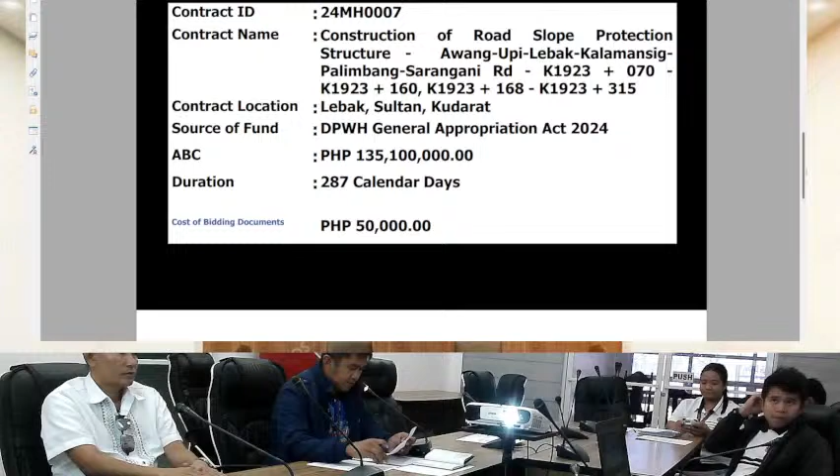So for our basic contracting, we have three civil works projects to discuss. First, we have 24MH0007, construction of road slope protection structure along Lebak, Sarangani Road, kilometer 1923 plus 070 to kilometer 1923 plus 160, and kilometer 1923 plus 168 to kilometer 1923 plus 315. Contract location, Lebak, Sultan Kudarat. The source of fund is DPWH General Appropriation of 2024 with an ABC of 135,100,000 pesos and a duration of 287 calendar days.

This is a rebid project due to the first bidding being declared a failure, dahil na-found out na merong mali sa programming ng kanyang program of works. So next is the 24MH0008.

24MH0008, construction of road slope protection structure along Lebak, Sarangani Road, kilometer 1923 plus 879 to kilometer 1924 plus 014, kilometer 1924 plus 513 to kilometer 1924 plus 660. Contract location, Lebak, Sultan Kudarat. Source of fund, DPWH GAA 2024 with an ABC of 141,855,000 pesos and a duration of 293 calendar days.

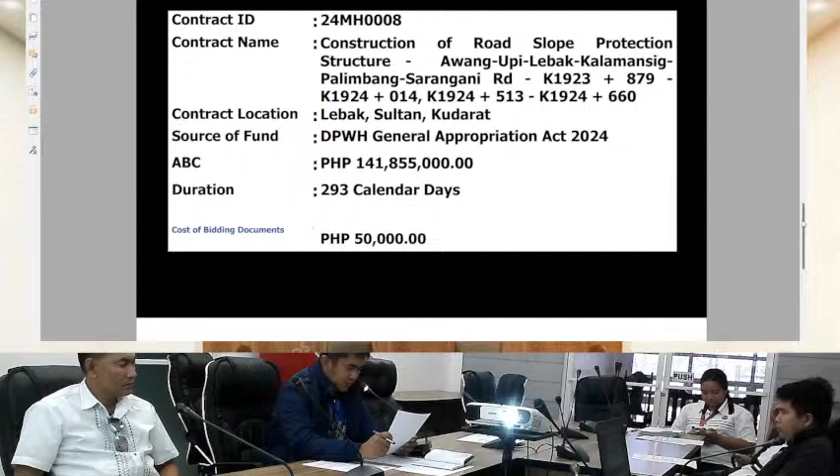Same with the previous contract 24MH0007, this project is also a rebid project due to the first bidding or first activity of this same contract ID being declared failed, dahil meron nagkamali sa programming o sa POW.

Next, contract ID 24MH0079, construction of employees quarters at DPWH Sultan Kudarat 2nd District Engineering Office, Lebak, Sultan Kudarat. Contract location, Lebak, Sultan Kudarat, with an ABC of 12,372,500 pesos and a duration of 240 calendar days.

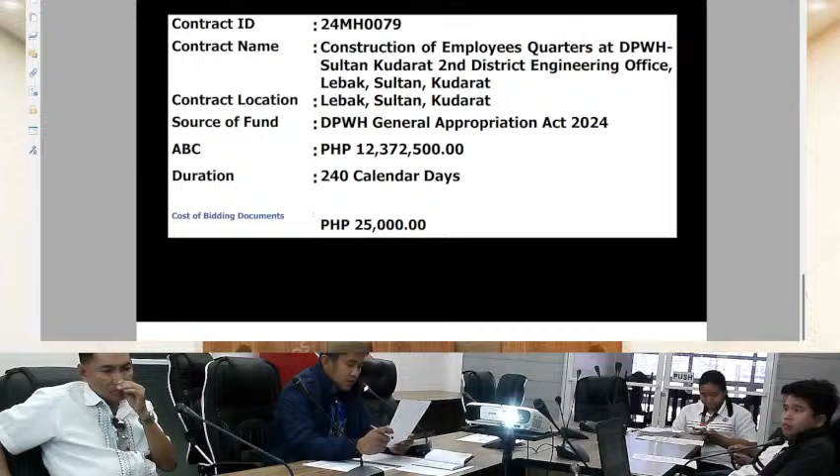So next, we'll have the discussion from the end user, the planning design section, represented by the engineers. First, we'll have the discussion on the first two projects, 24MH0007 and 24MH0008.

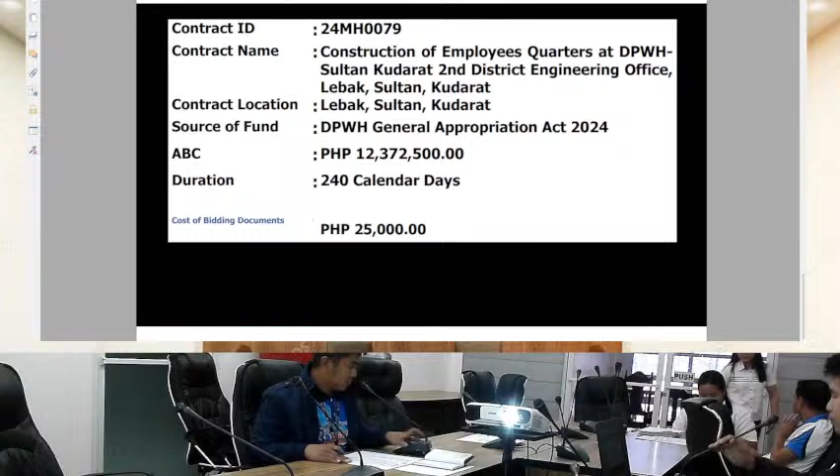Good morning, everyone. I'm presenting this project with the contract name Construction of Road Slope Protection Structure, Awang Upi Lebak, Palimbang, Sarangani Road from kilometer 1923-070 to kilometer 1923 plus 160, and the other section is kilometer 1923 plus 168 to kilometer 1923 plus 315. Contract location is Lebak, Sultan Kudarat with the ABC amount of 135,100,000 pesos.

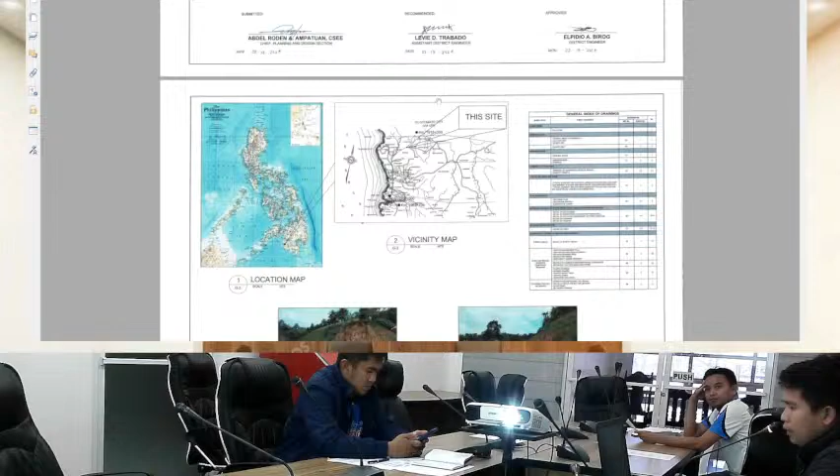Let's proceed to the DED. First is the detailed engineering design plan. Next is the location map and the vicinity map, the geotag photos. Next page is the quarry map, the general notes, the abbreviations and symbols.

For the summary of quantities: for earthwork, sub-base and base courses, aggregate sub-base course, 45 cubic meter. For surface courses, Portland cement concrete pavement, 225 square meter. For the bridge construction, item 404, reinforcing steel grade 40, 1,785 kilograms. Structural concrete, 20.68 MPa class A, 28 days, 43 cubic meter.

For the drainage and slope protection structures, we have catch basin, 910 mm diameter, two pieces. Concrete slope protection, 531.25 cubic meter. For the erosion control mat type 1, 3,971.20 square meter. For the permanent ground anchor, we have 9,932 linear meter. Hydro seeding, 3,971.20 square meter. For the active wire mesh, 3,971 square meter.

For the miscellaneous structures, we have coco net, 3,971.20 square meter. For the tapered solar street light, we have 9. For the quantity sheets, we have the station, the area fill, the span, the volume of fill, and the structural excavation.

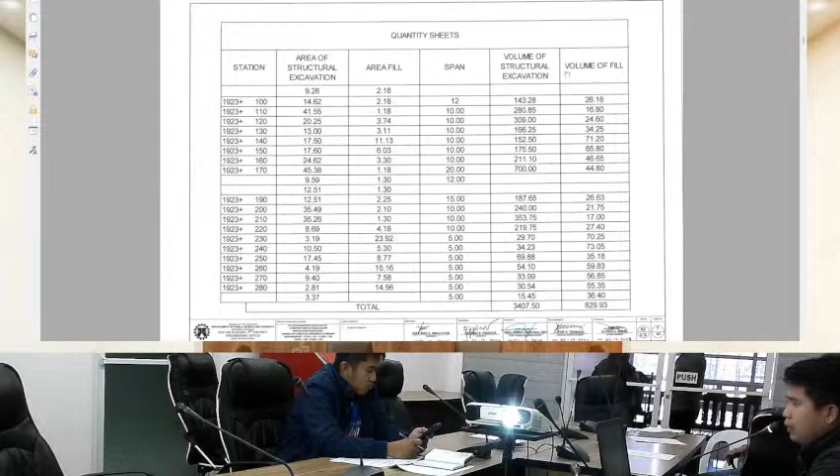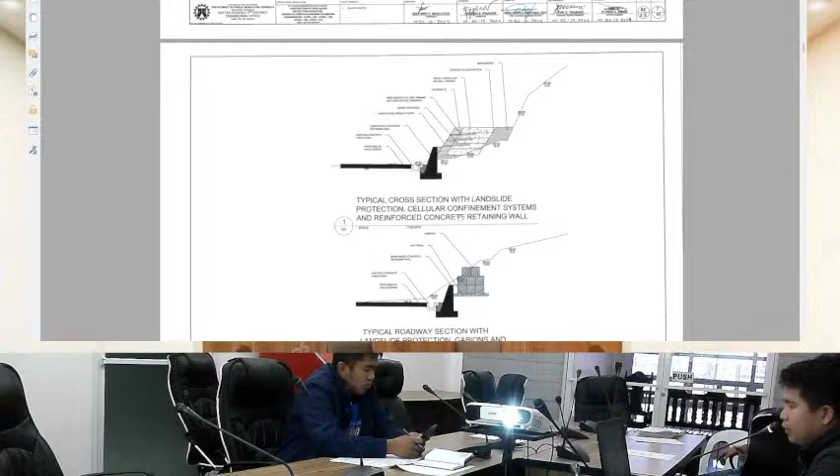Here is the typical cross-section with landslide protection, cellular confinement system, and the reinforced concrete retaining wall. So here in the design, you can see we have 19 layers of geogrid, and we have also vegetation and grass cover, and the reinforced concrete retaining wall, and meron tayong details sa baba nito.

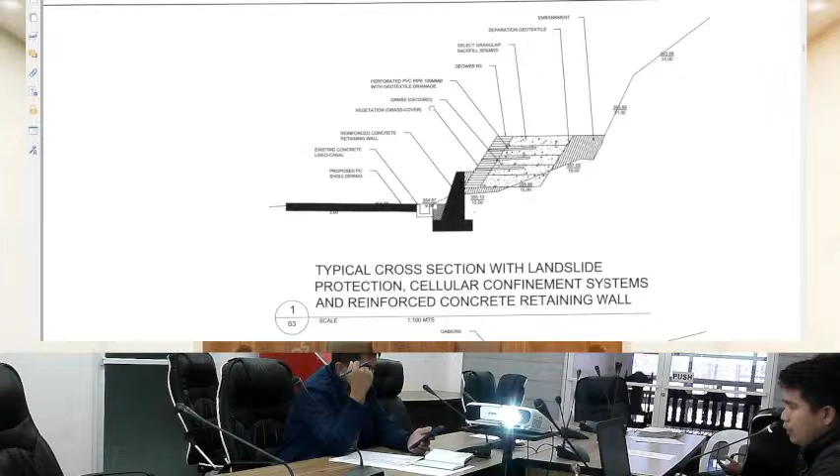We have also proposed shouldering, and we have also separation geotextile, and the perforated pipe 100 mm diameter. We have 3 layers of that perforated pipe. And for the other portion, we have also gabions and mattress.

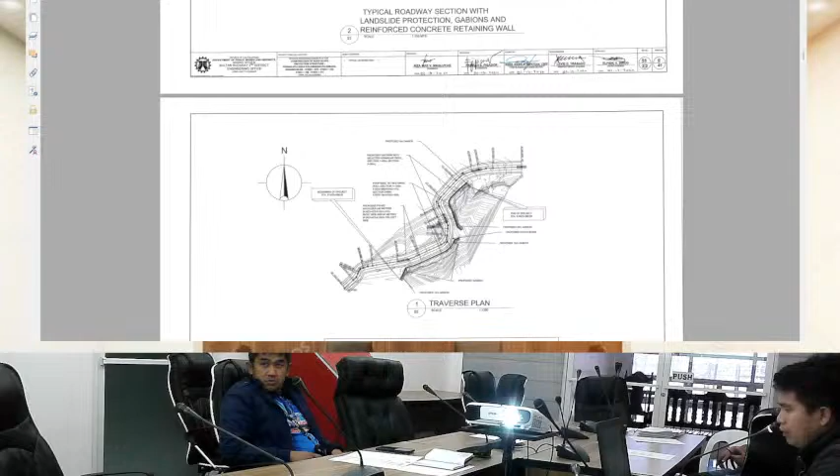Here is the traverse plan and the center line profile. The details of our catch basins. The schedule of the catch basin is in station 1923-170 on the right side.

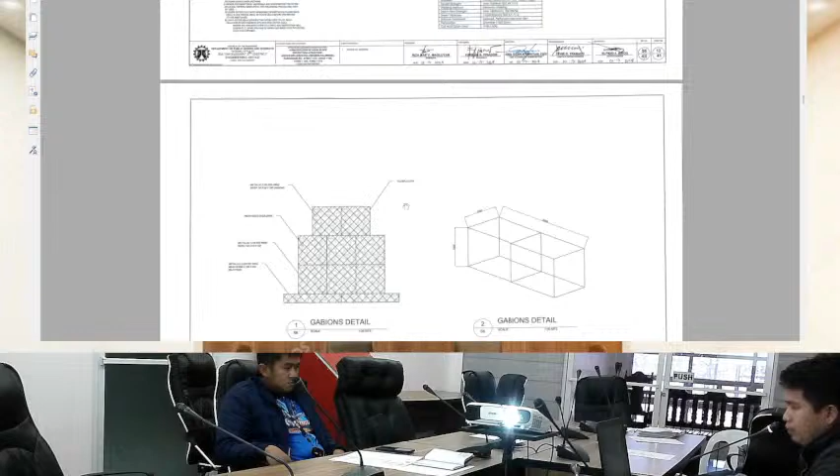We have also the reinforced concrete landslide protection retaining wall, 3 meters in height. The details of the geogrid detail, the geoweb with geogrid details, the cellular confinement system drawing, the details of gabions and mattress. Next are the cross sections.

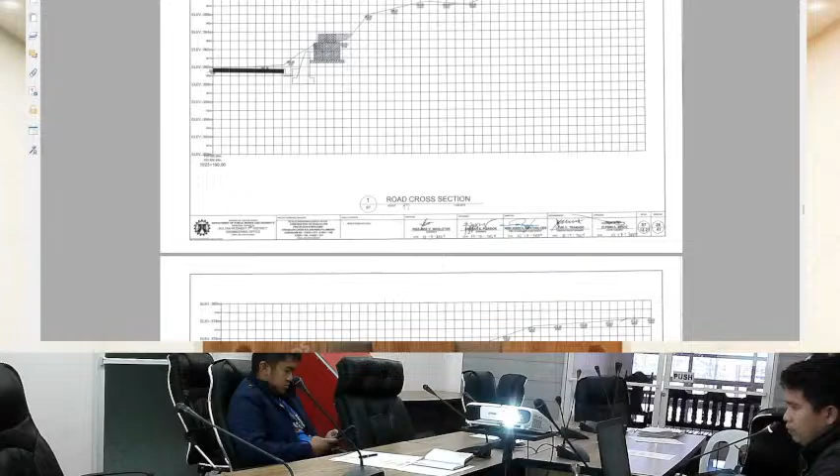Here are the details of the solar street light post with pedestal, the traffic management plan, the detail of construction mesh fence, the road plastic barriers, and our standard project billboard.

Next project that I will be presenting is 24 MH.

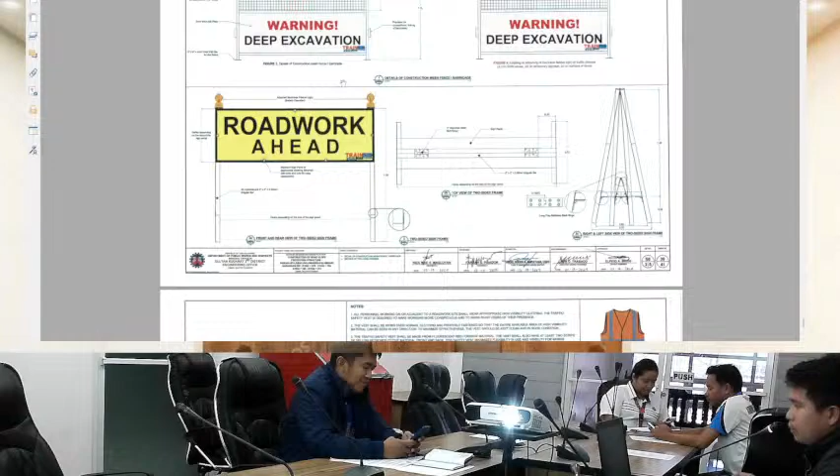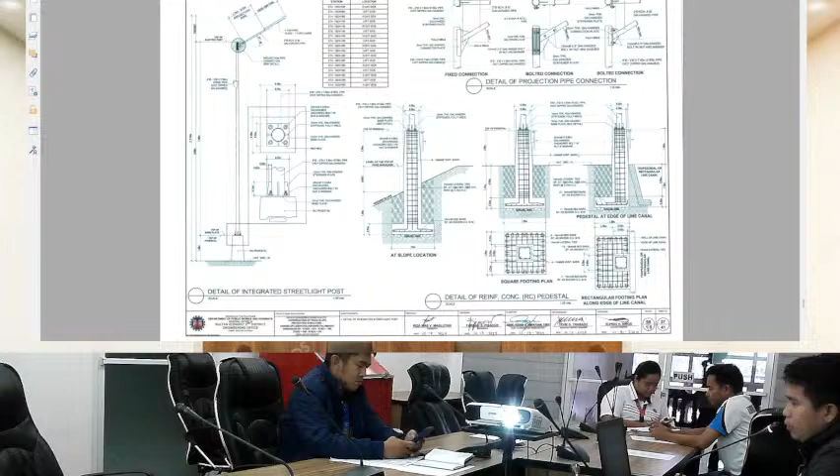We have a rectification here on our solar street light post. Fabricated ones are not allowed. The standard tapered one that is purchased should be used, not the fabricated kind. The length should follow the standard; welding is not allowed because the connection becomes weak. So to the contractors, please follow the ordered length strictly, to prevent rectification during inspection. Thank you. Next project is the

24H008, contract name is the construction of road slope protection structure, Awang Upi, Lebak, Kalamansig, Palimbang, Sarangani Road, from kilometer 1923 plus 879 to kilometer 1924 plus 014.

Second station, kilometer 1924 plus 513 to kilometer 1924 plus 660. Contract location is Lebak, Sultan Kudarat, with an ABC amount of 141,855,000. For the detailed engineering design plan, we have 1,974 square meters.

Here is the location map and the vicinity map. For the quarry map, the general notes, next is the abbreviation and symbols.

Here is the summary of quantities. For the sub-base and base courses item, 176.33 cubic meter. For the surface courses, Portland cement concrete pavement, 174 square meter.

For the drainage and slope protection structures, concrete slope protection, we have 1,551 cubic meter. For the gabions, 1 by 1 by 2 metallic coated, 560 cubic meter. For the mattress, we have 201.6 cubic meter.

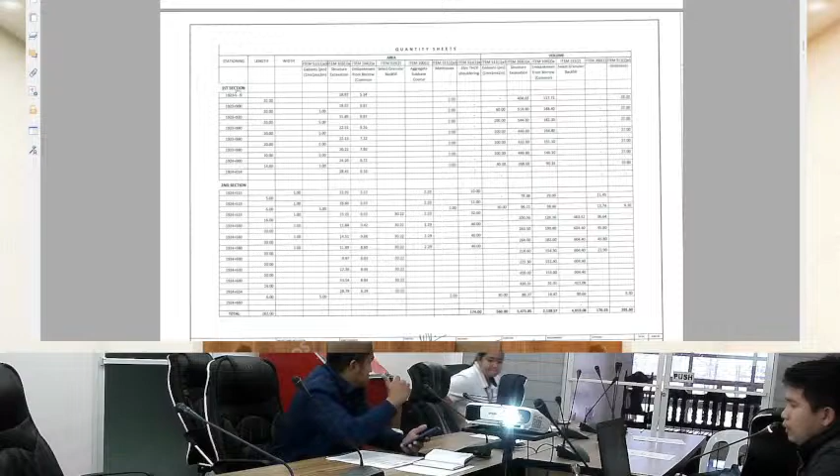Next is the quantity sheets. You can see the first section and the second section and its total quantities. Next is the typical roadway section with normal crown, reinforced concrete retaining wall with cellular confinement system, geoweb, and solar

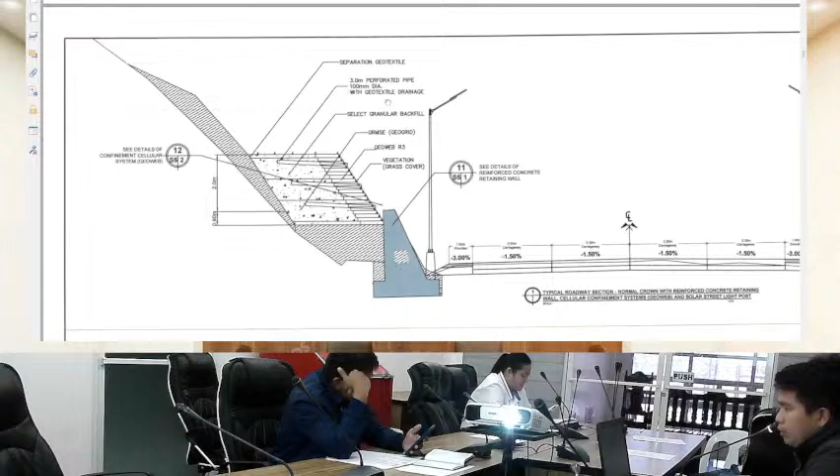So here we have geotextile separation, here it is. The perforated 3 meters perforated pipe, 100 mm diameter, with geotextile drainage, here it is. For the GRMSE geogrid, for the GeoWeb R3, and for the vegetation, don't forget the vegetation grass cover because it is needed.

Next, we also have details of the reinforced concrete retaining wall. So here, for the second station, we have gabions, head size boulders for gabions, metallic coated wire mesh for gabions and for mattresses.

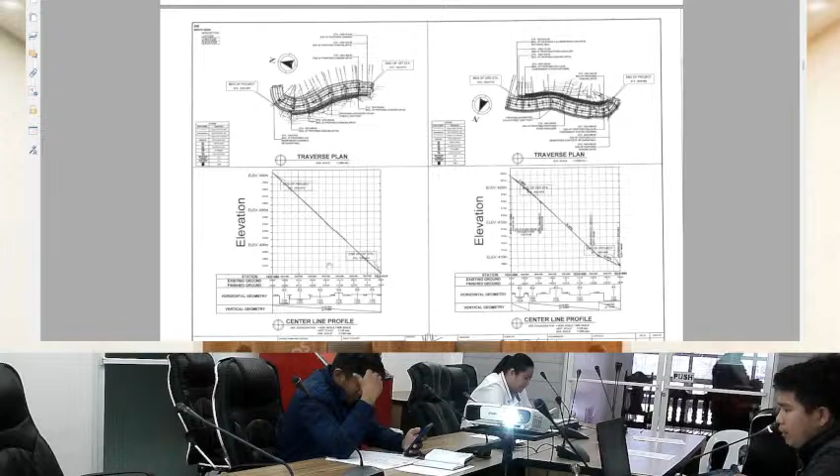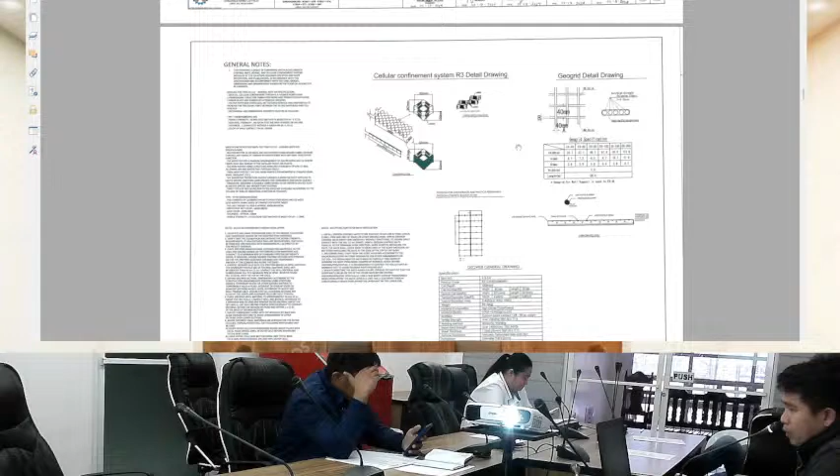Here is the traverse plan for the first section and the traverse and centerline profile for the second section. For the details of the 2 meters reinforced concrete landslide retaining wall, the details of the geogrid and the perforated pipe details, the general confinement of cellular system drawing and also details of the geogrids, the details of gabions and mattresses, and next are the cross sections.

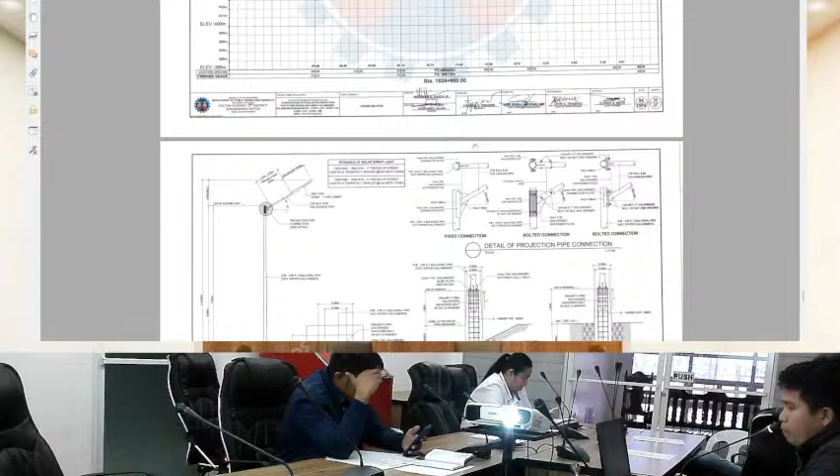We also have the details of the integrated solar street light post. As I mentioned earlier, it should be full length, not one with welding.

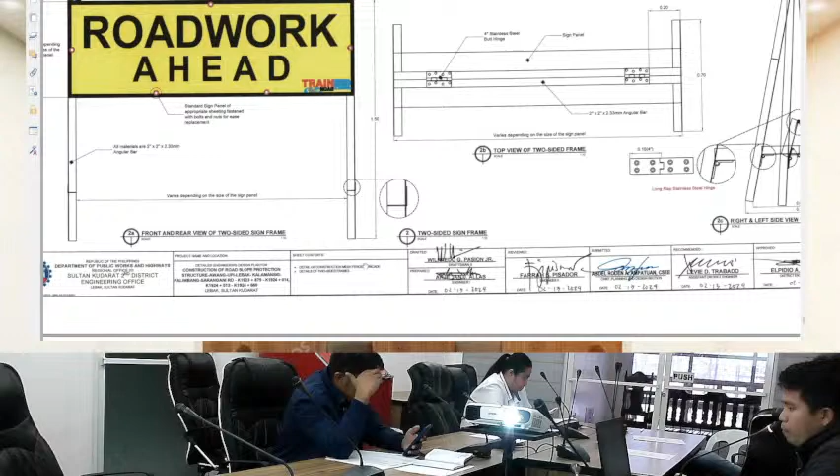Here is the typical traffic management plan, the construction mesh fence barricade, the road plastic barriers, and the project's signage.

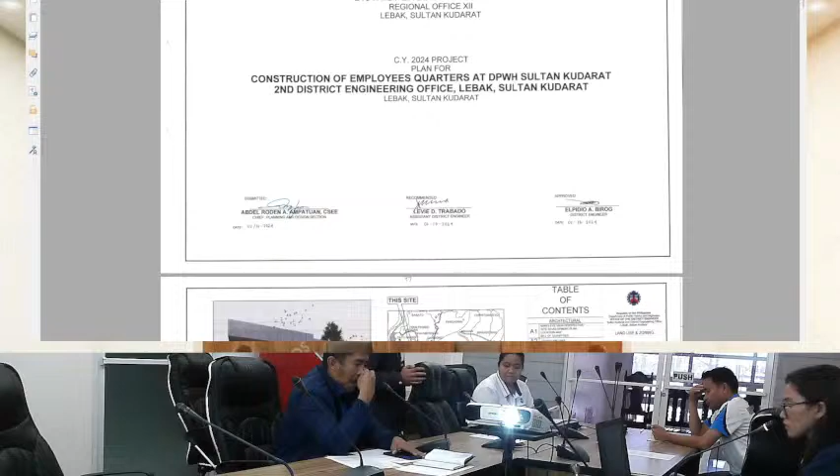Today I will be discussing the one MPB project with contract ID 24MH079, construction of employees quarters at DPWH Sultan Kudarat 2nd District Engineering Office, Lebak, Sultan Kudarat, with an ABC of 12,372,500 and a duration of 240 calendar days. This building is a new construction which is a two-story building.

This is the perspective of the building here. We also have the location map and the site development plan of the project within the vicinity of the DPWH.

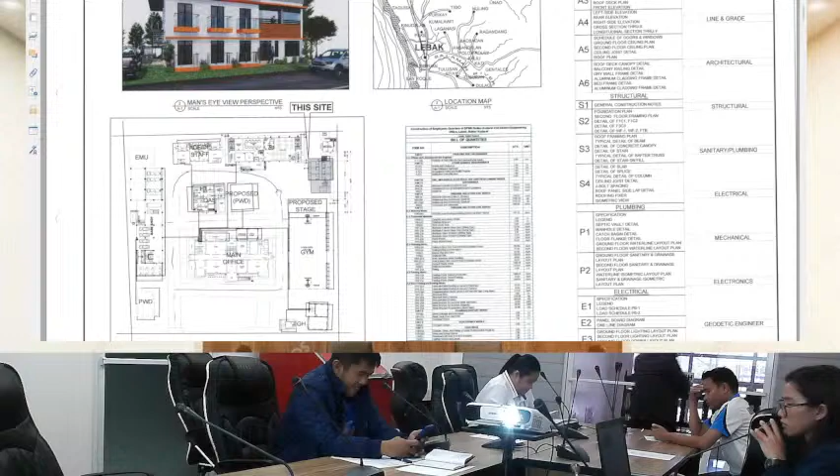For the bill of quantities, we have provision of field office for the engineers, rental basis, 6 months. For permits and clearances, 1 lump sum.

Project billboard/signboard, one each. Occupational safety and health program, 1 lump sum. Mobilization and demobilization, 1 lump sum.

For civil, mechanical, electrical, and sanitary plumbing works, for earthworks, we have structural excavation, common soil, 173.01 cubic meter.

For embankment from roadway/structure excavation, 119.16 cubic meter. For gravel fill, we have 27.67 cubic meter. For finishing and other civil works, we have...

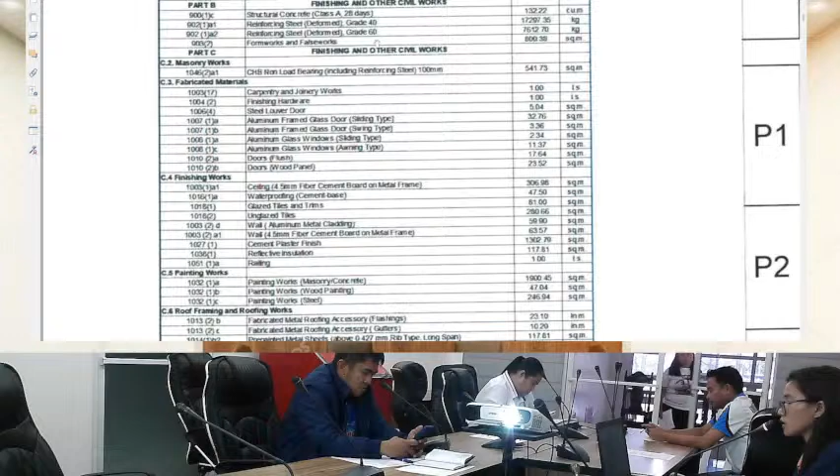For structural concrete class A, 132.22 cubic meter. For reinforcing steel deformed bars, grade 40, 17,297.35 kilogram.

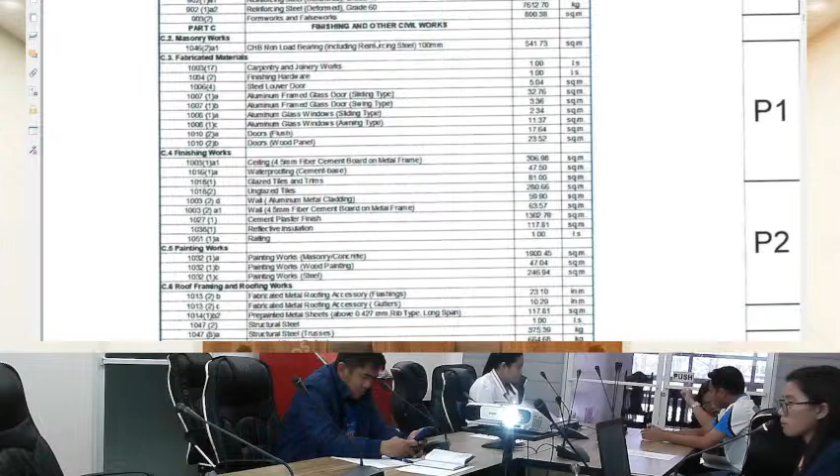And for grade 60, we have 7,612.70 kilogram. And for formworks and falseworks, we have 800.38 square meter.

For masonry works, we have here CHB non-load bearing, including reinforcing steel, 100 mm thick, 541.73 square meter.

For fabricated materials, for carpentry and joinery works, 1 lump sum, finishing hardware, 1 lump sum, steel louver door, 5.04 square meter, aluminum frame glass door, sliding type, 32.76 square meter.

For swing type, we have 3.36 square meter.

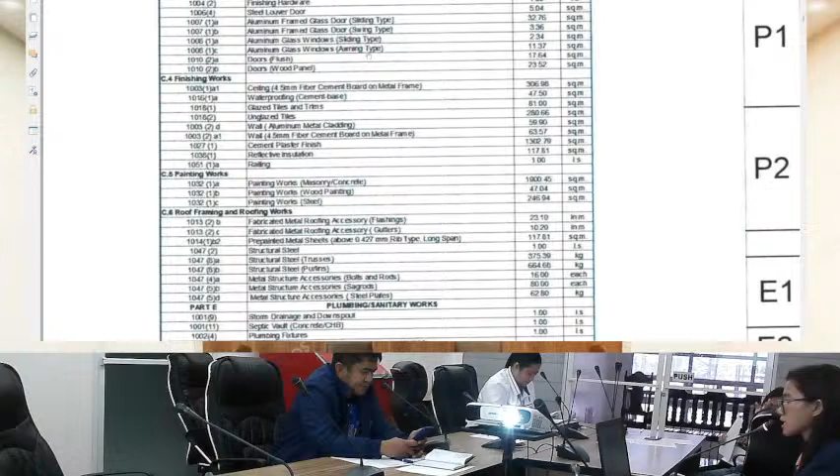And for aluminum glass windows, sliding type, 2.34 square meter. And for awning type, we have 11.37 square meter.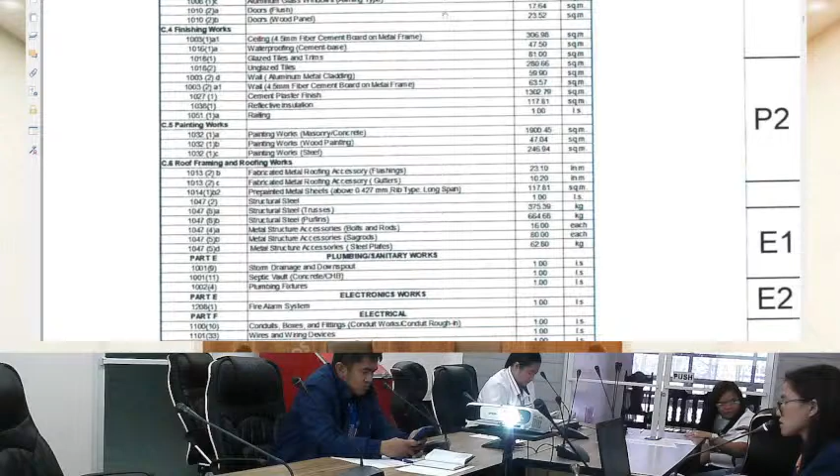Doors, flush, 17.64 square meter. And for wood panel doors, we have 23.52 square meters.

For ceiling, 4.5 fiber cement board on metal frames, 306.98 square meter.

Waterproofing cement base, 47.5 square meter. Glazed tiles and trims, 81 square meter. Unglazed tiles, 280.66 square meter.

Aluminum metal cladding for walls, we have 59.90 square meter. 4.5 fiber cement board on metal frame wall, 63.57 square meter.

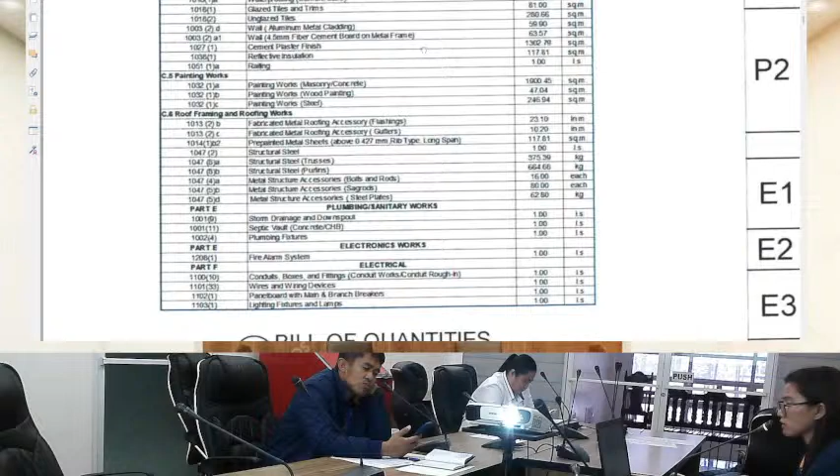Cement plaster finish, 1,302.79 square meter. And for reflective insulation, we have 117.81 square meter.

For railing, we have 1 lump sum. For painting works, for masonry/concrete, 1,900.45 square meter.

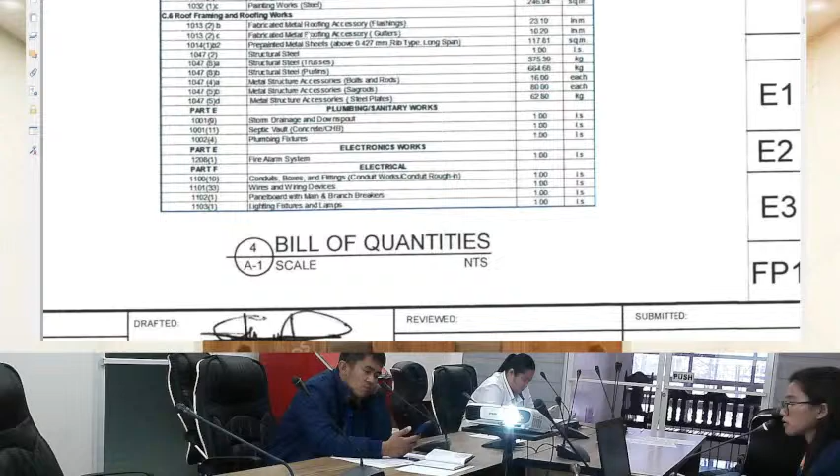For wood painting, 47.04 square meter. And for steel, we have 246.94 square meter. We have also here for roof framing and roofing works, fabricated metal accessory, flashing, 23.10 linear meter.

For gutters, 10.2 linear meter. For pre-painted metal sheets, 117.81 square meter. For structural steel, 1 lump sum.

For structural steel trusses, 375.39 kilogram. For purlins, we have 664.68 kilogram.

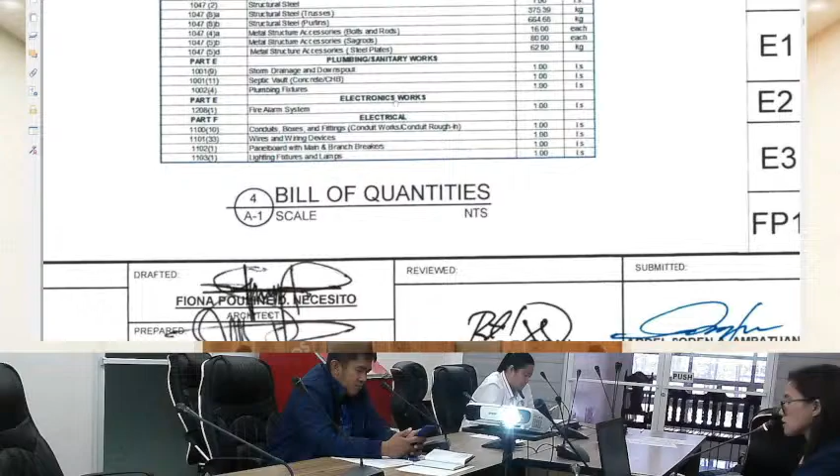And for metal structure accessories, bolts and rods, 16 each. For sag rods, 80 each. And for steel plates, we have 62.8 kilogram. We have also here for plumbing, electronics, and electrical works.

For the ground floor, here we have the dimension of 15 by 9.5 here.

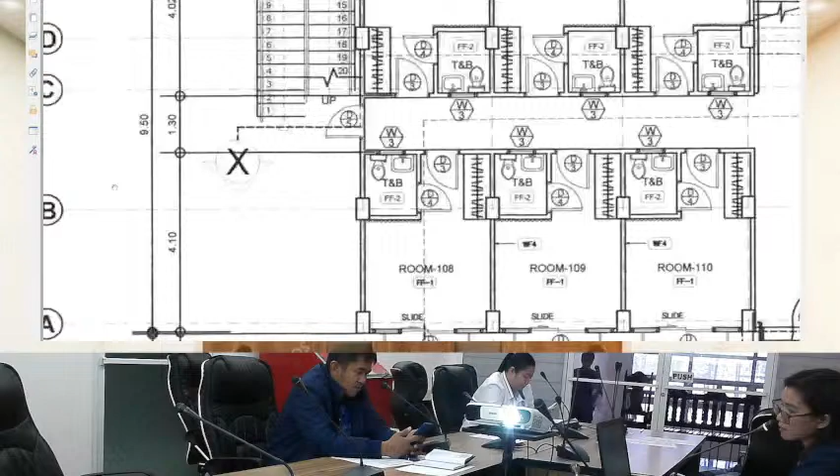With 12 rooms, 6 at the ground and 6 at the second floor. And at the left side, we have the fire exit, which is steel.

Next, we have the ground floor ceiling plan here, the roof plan. This is for second floor, and this is for the roof deck roofing.

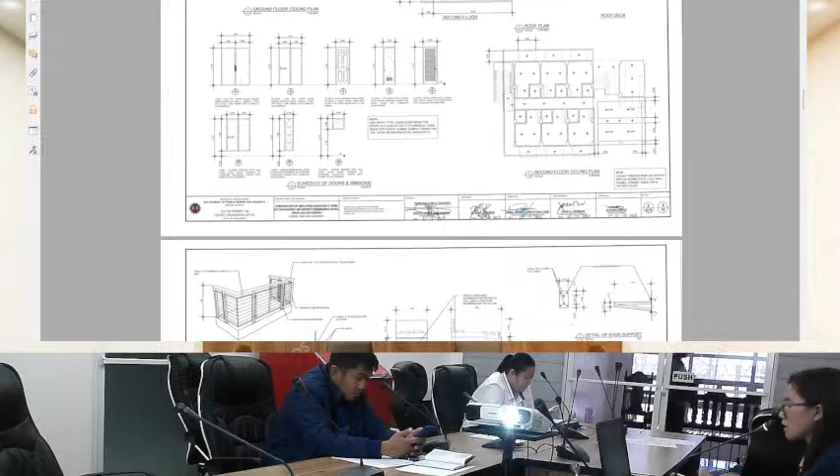Next, we have the schedule of doors and windows, and the second floor ceiling plan here.

Next, we have the detail for our railings. The detail of the roof deck canopy detail, the drywall details, the aluminum cladding frame details, and the detail of the fire exit stair.

We have also here the detail of the beds, 12 sets.

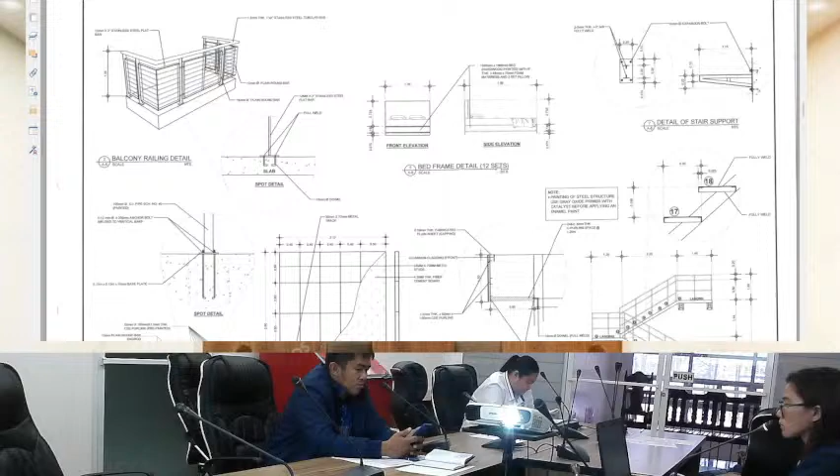And for the drywall, it is located, or this is for the inner partition of the room here.

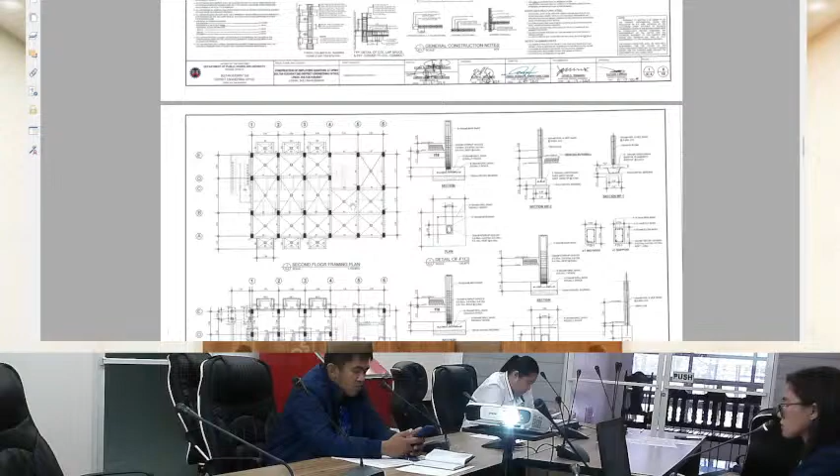Next, we have the general construction notes, and the next page is the foundation plan and the second floor framing.

The details of the F1C1, F1C2, the wall footings and the beams here, footing tie beam rather.

Next, we have here the roof framing plan, the typical detail of the beams and the detail of the stairs and the rafter detail.

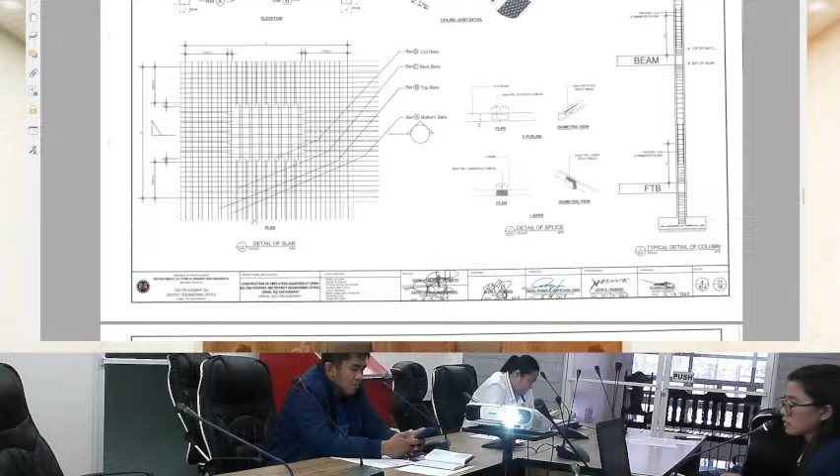Next, we have the detail of slab here, the schedules of the steel bars, the detail of ceiling joists, the detail of splice for...

the C-purlins and the trusses, the details of the roofing here, the J-bolt spacing, roof panel side block details, roofing fixture, and isometric view of the roofing.

Next, we have the typical detail of column here.

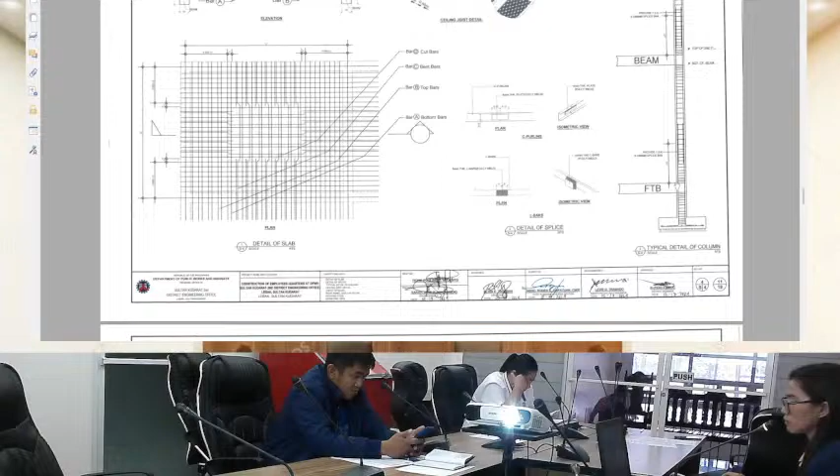Please note that we must provide a 1.2 meter, 8 pieces, 16 mm splice bar here at the L/3 of the column from FTB, and for the second floor from B.

Next, for plumbing works, we have here the detail of the septic vault, the detail of manholes, the floor plan details, catch basins, and we have also here the detail of the second floor water line layout and the second ground floor.

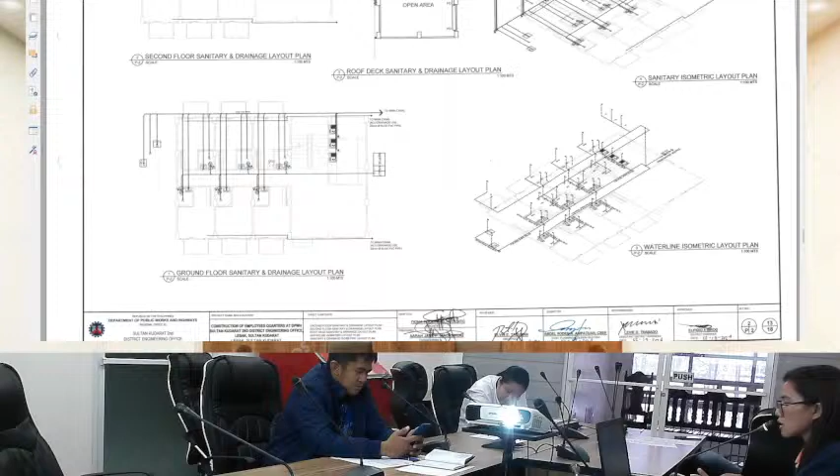Next, we have the detail for sanitary and drainage layout plan for ground floor and second floor here, and we have also here for the roof deck, and we have also here the isometric view of sanitary and the water line layout from ground floor to second floor.

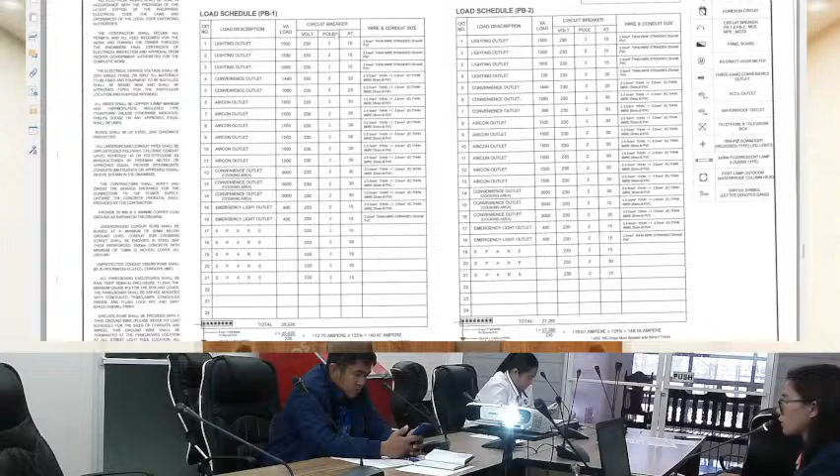Next, for electrical, we have here the load schedule of panel board 1 and panel board 2 for second floor. Here, the diagram of the panel boards. We have here panel board 1 for ground floor and panel board 2 for second floor, and we have also here the main panel board of those two mentioned panel boards for every floor, and we have also here the one line diagram.

Next, we have the detail of the layout plan for the ground floor and second floor, the power layout, and the lighting layout of ground floor and second floor.

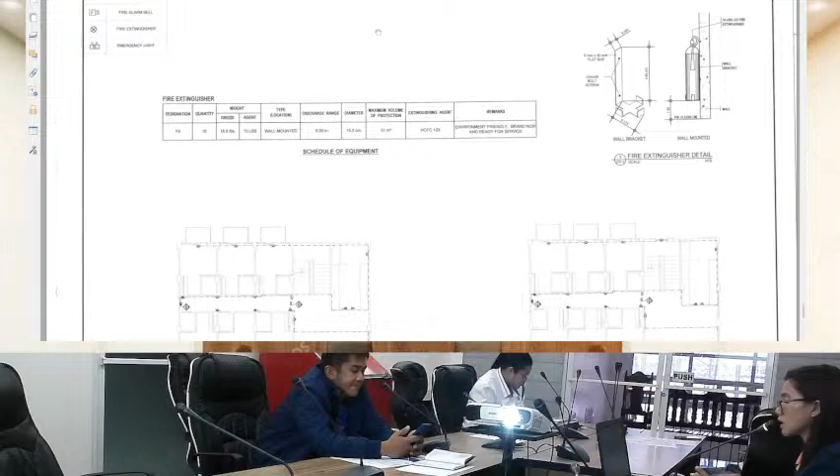Next, we have here for electronics, the emergency layout plan for ground floor and second floor. Here, we have also the schedule or the table for the fire extinguisher: its designation, quantity, types, discharge range, maximum, and extinguishing agent. And we have also the remarks, and the fire extinguisher detail.

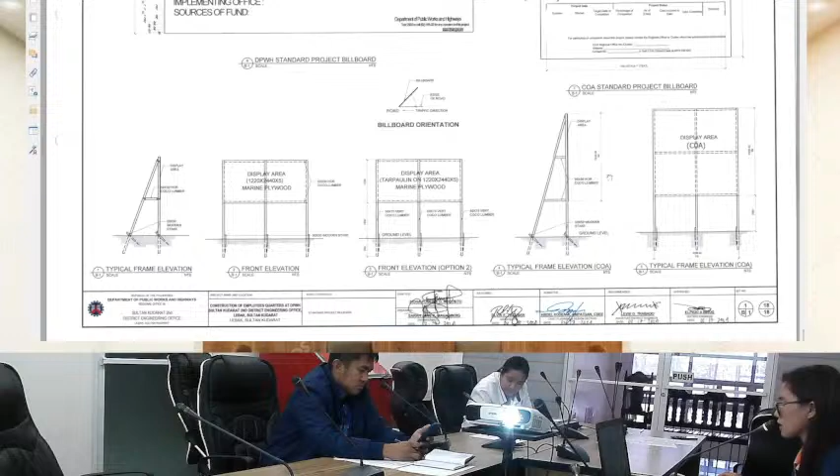And lastly, we have the standard project billboard for DPWH and COA. And that would be all.

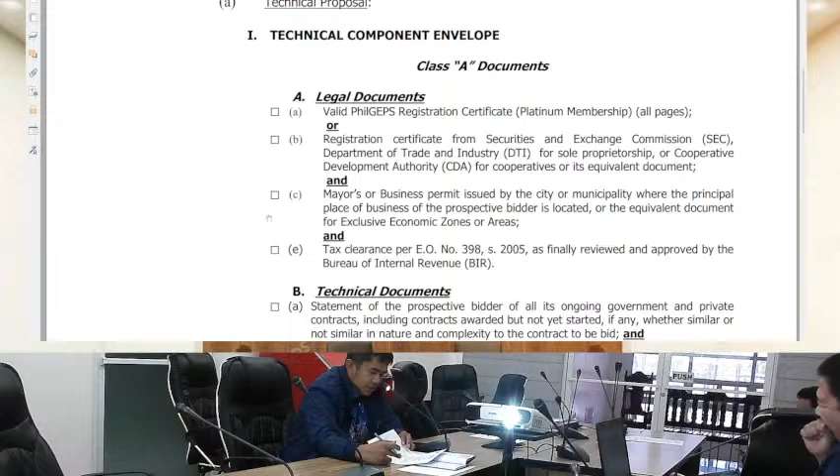Next is the tax clearance per Executive Order number 398 series of 2005, as finally reviewed and approved by the Bureau of Internal Revenue. So under all these legal documents, make sure they are updated on the date of opening of bids or other relevant date of drafting of bids.

Next, technical documents to be submitted by the bidder should first be the statement of the prospective bidder of all its ongoing government and private contracts, standard format. Next, statement of the bidder's single largest completed contract, or SLCC, similar to the contract to be bid, also standard format, following the format found in the Philippine Bidding Documents.

Next, the Philippine Contractors Accreditation Board (PCAB) license, or special PCAB license in case of joint ventures, and registration for the type and cost of contract to be bid. So this requires an attachment of the PCAB license, please do attach it.

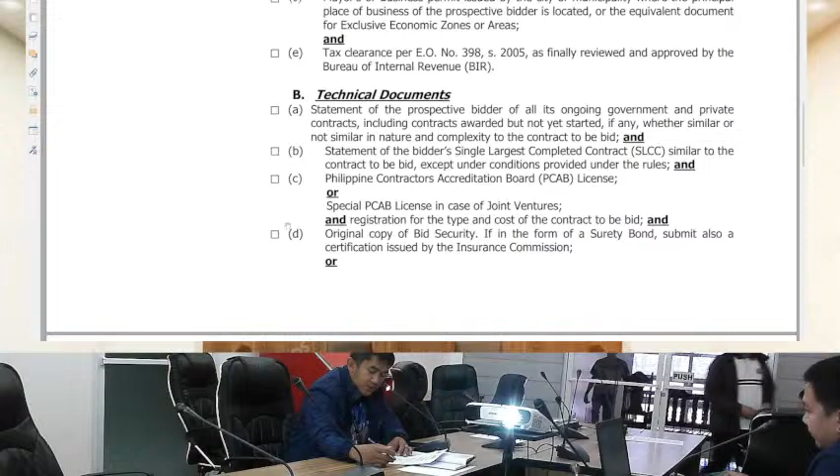Next, original copy of bid security. If in the form of a surety bond, submit also a certification issued by the Insurance Commission, or provide a notarized bid securing declaration. Make sure it is original.

Next, project requirements shall include the following: organizational chart for the contract to be bid, list of contractor's key personnel to be assigned to the contract to be bid, with their complete qualification and experience data.

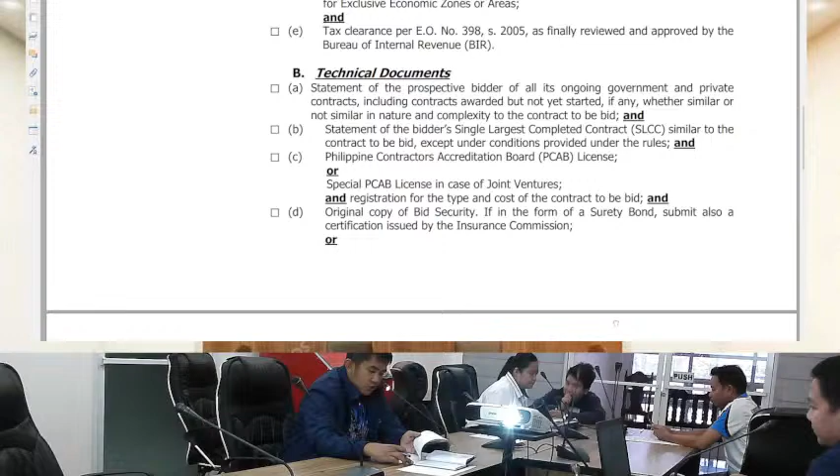Next, the list of contractor's major equipment units which are owned, leased, and/or under purchase agreement, supported by proof of ownership or certification of availability of equipment from the lessor/vendor for the duration of the project, as the case may be.

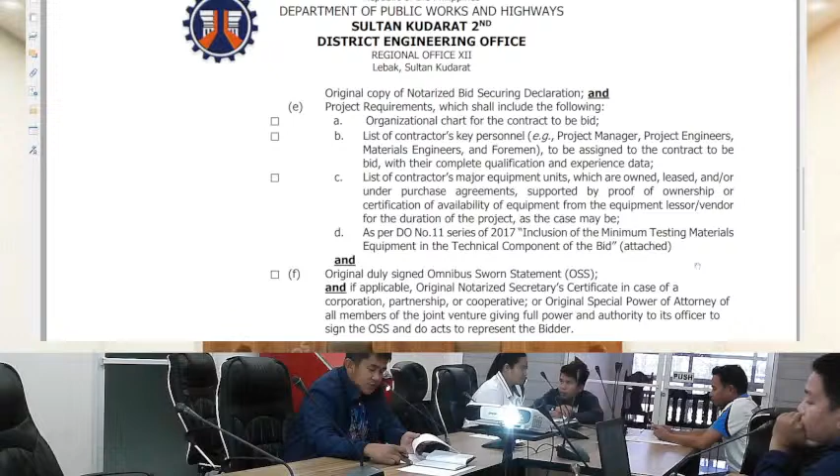Next is per DO number 11 series of 2017, the inclusion of the minimum testing materials equipment in the technical component of the bid. So these project requirements make sure the document is signed, updated, and valid.

Next, item F, the original duly signed omnibus sworn statement or OSS, and if applicable, original notarized secretary's certificate in case of corporation, partnership, or cooperative, or original special power of attorney of all members of the joint venture giving full power and authority to its officer to sign the OSS and do acts to represent the bidder.

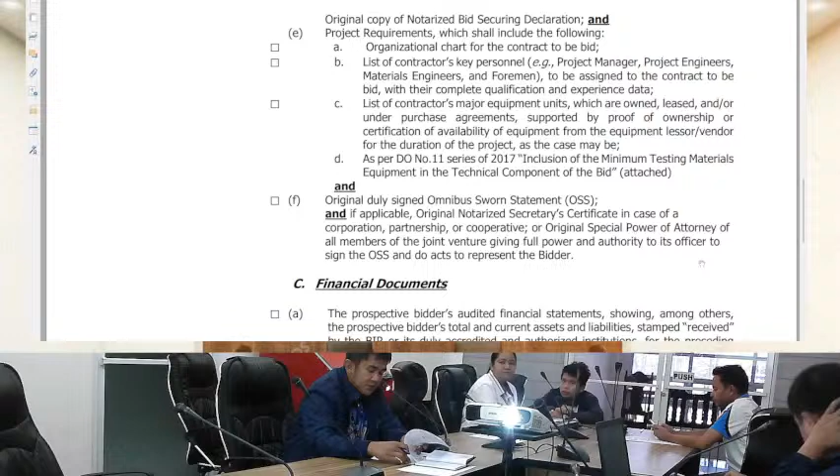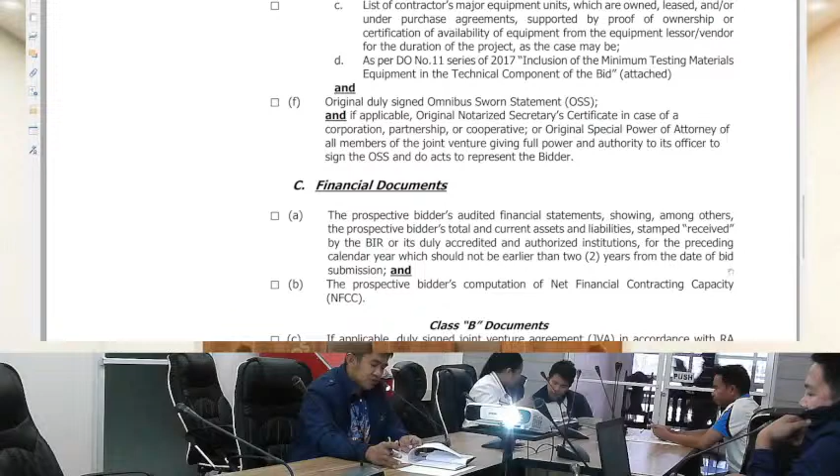And the NFCC, or the prospective bidder's computation of net financial contracting capacity. If applicable, duly signed joint venture agreement in accordance with RA number 4566 and its IRR in case the joint venture is already in existence, or a joint statement from the potential joint venture partners stating that they will enter into and abide by the provisions of the joint venture agreement in the instance that the bid is successful.

So that comprises our technical component or technical proposal. Next, we have the financial proposal.

For the financial proposal, the original of duly signed and accomplished financial bid forms under the format - please do follow the format we provided. And other documentary requirements under RA number 9184: the original duly signed bid prices in the bill of quantities, duly accomplished detailed estimates form including summary sheet indicating the unit price of construction materials, labor rates and equipment rentals, in coming up with the bid, and cash flow by quarter.

So once again, these items under our financial proposal have a format, please do follow the format. And please make sure that all documents being submitted are signed, signed by the owner or proprietor of the firm.

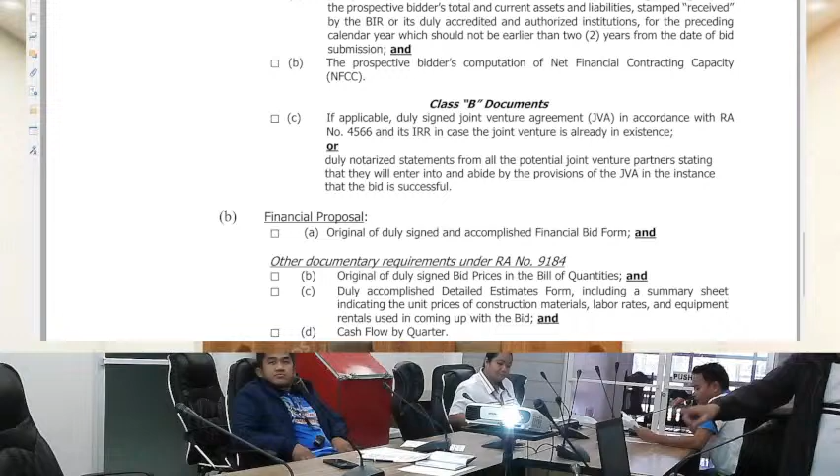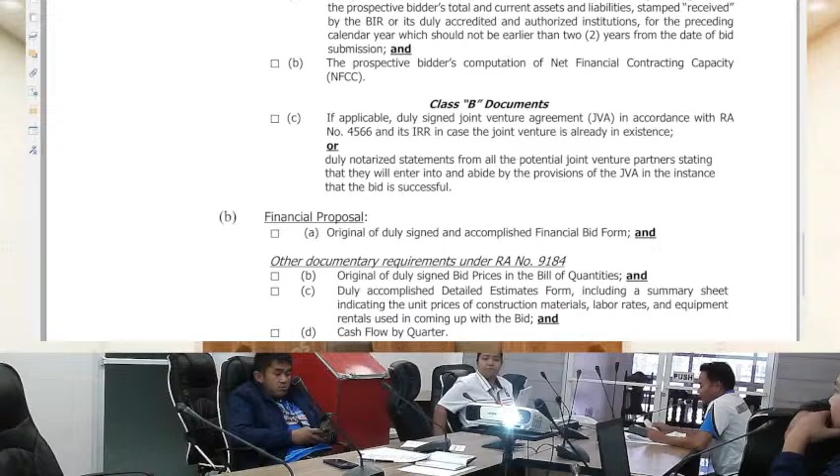So at this point, we're going to discuss the next agenda: the criteria and procedure for eligibility check, preliminary examination of bids, detailed evaluation of bids, post-qualification, and award. All the bidders and contractors are already familiar with what is called CWA. Our eligibility check is performed electronically through a system called Civil Works Application.

Prior to eligibility processing, we conduct contract profiling through this system, wherein during contract profiling we import the basic contract data for each contract ID. This data is the basis for the system to determine whether the bidder for a particular contract ID is eligible or ineligible.

The eligibility check is done almost simultaneously with the opening of bids. While the BAC members are opening the technical proposals of the bidders, we conduct the electronic eligibility processing. But only those bidders who have purchased the bidding documents and at the same time dropped their bid envelope for a particular contract ID are included in the eligibility processing.

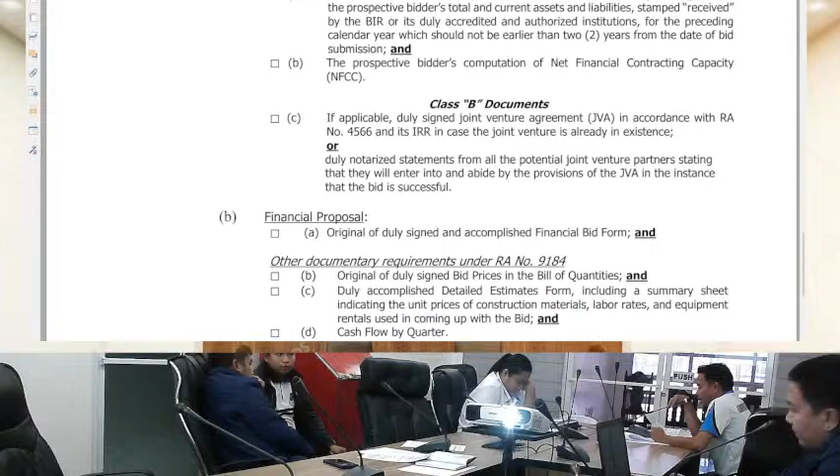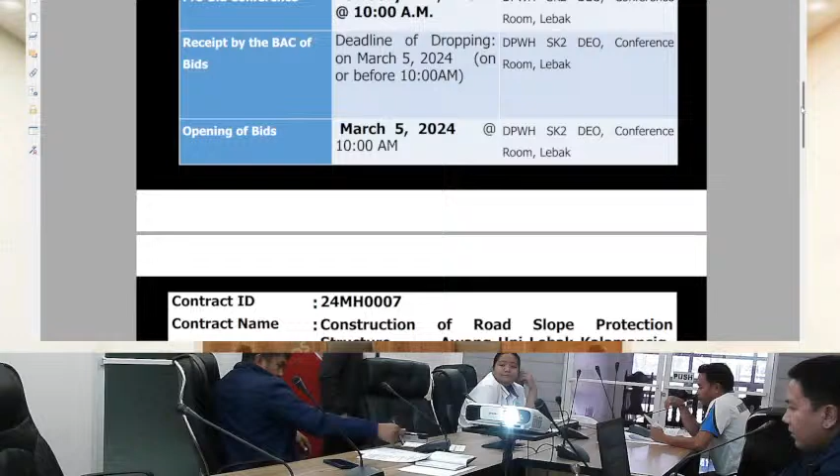So for the bidders found ineligible where no motion was raised, there will be no opening of the financial proposal, and their bid envelope will be returned immediately.

But for the bidders found ineligible who raise a motion for reconsideration and submit the letter for reconsideration within 3 days to this office for resolution - if the request for reconsideration is granted, the concerned bidder will be reprocessed in the eligibility processing. Of course, we will request an unlocking.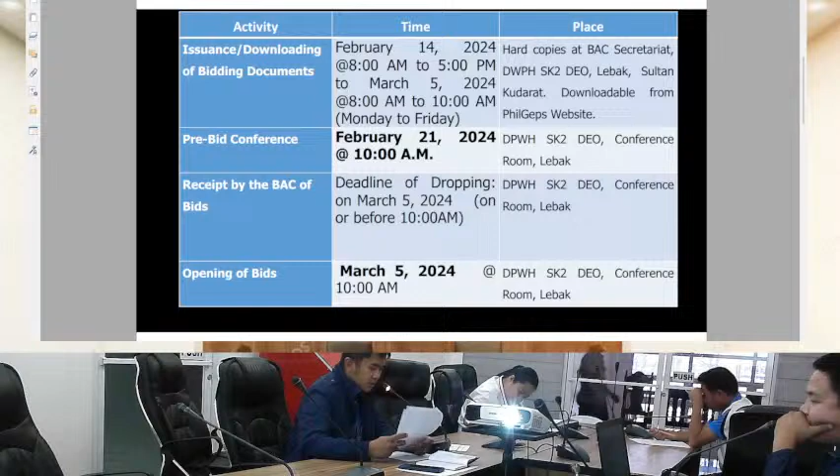So next, after the discussion of the criteria and procedure for eligibility check, preliminary examination of bids, detailed evaluation of bids, post-qualification, and award, we move to the next agenda: questions, comments from bidders, and replies from the procuring entity and other representatives.

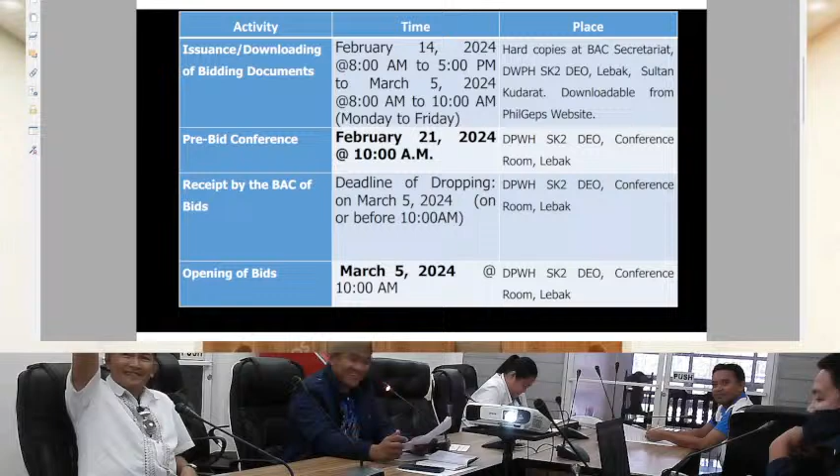During our livestreaming, if there are any on-the-spot inquiries online, we can answer them right away. But if after this activity you have questions once this activity goes offline, prospective bidders are still welcome to raise their concerns. If you want clarification, we are accepting letters so we can clarify and answer through letters.

So next, we discuss other matters. We will discuss the schedule. Flash on your screens are the schedules planned before. We are conducting this pre-bid conference today, February 21, 2024.

The deadline for these three projects, the deadline for submission of bids, is March 5, 2024, on or before 10 a.m. The opening of bids will follow after the deadline for submission of bids.

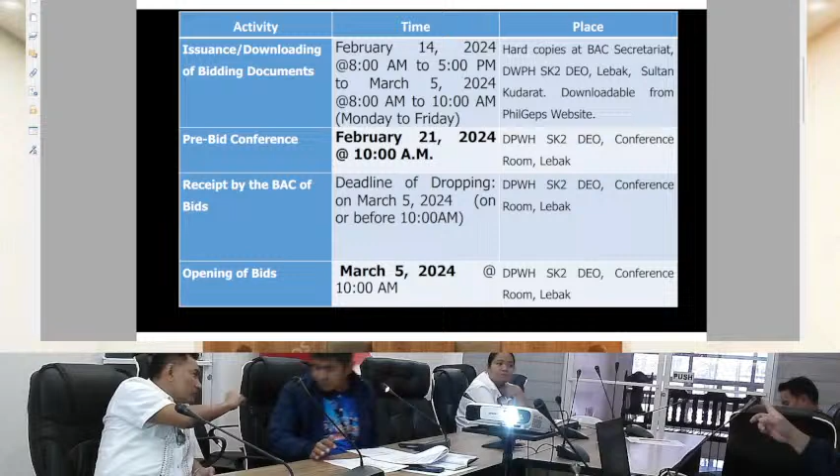And as a requirement, right, that's per our CPM.

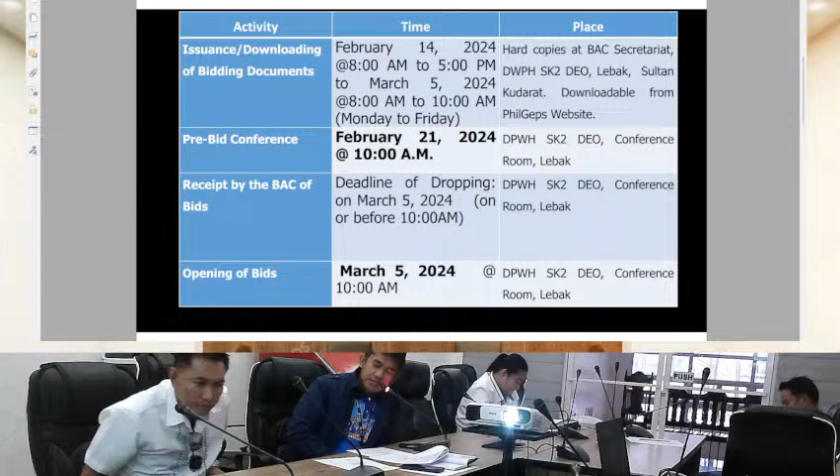Attach that accompanied by the transmittal letter, with the attachment being the list of requirements listed under the notice of award. That will take form part of the contract agreement. So once notified, you must also transmit to us your compliance with the requirements. You are given 10 days after receipt of the NOA to complete all the requirements for the completion of the contract.

Please make sure that if the contract is awarded to you and completed, you make sure you receive your notices and acquire your original copy of the contract, to make sure you have the documents in hand.

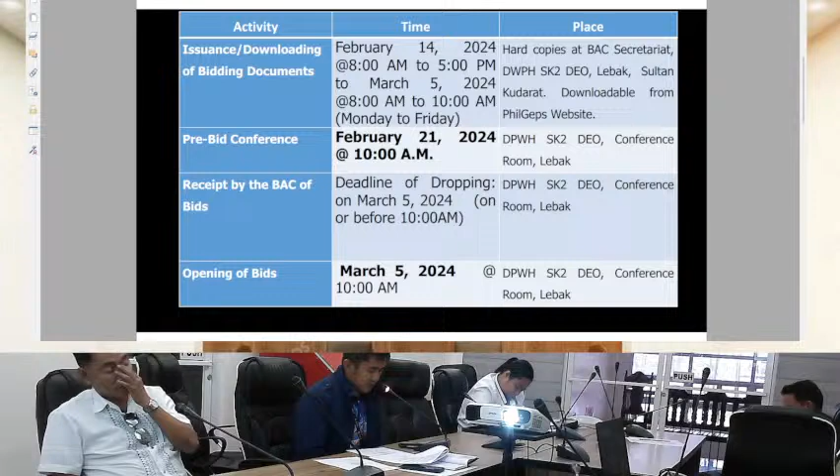We'll proceed to the next agenda, the summary of proceedings, including supplemental activities to be issued, to be discussed by one of our members of support staff in the procurement unit, Rosa Refemio.

Thank you, sir. Once again, good afternoon to everyone. We just conducted our pre-bid conference for 3 civil works projects. It was opened by the BAC chairperson, Assistant District Engineer Levin Indrabado, at exactly 11:30 in the morning.

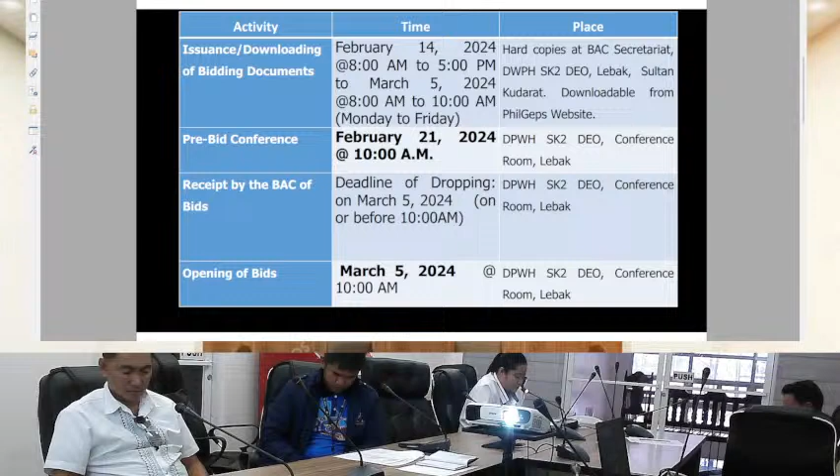It was then followed by the presentation of the agenda, and the brief presentation was conducted by Mr. Franco Valorizo. For the plans and design, it was discussed by two planning engineers, Engineer R.G. John J. Elias and Engineer Sarah J. Makasindi.

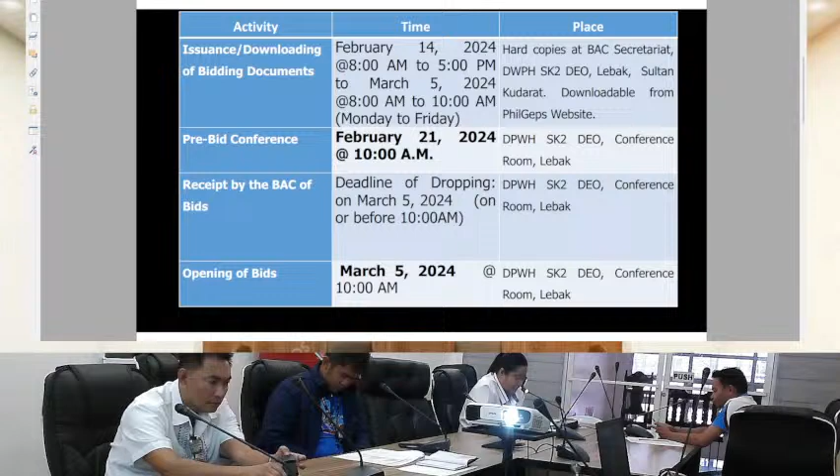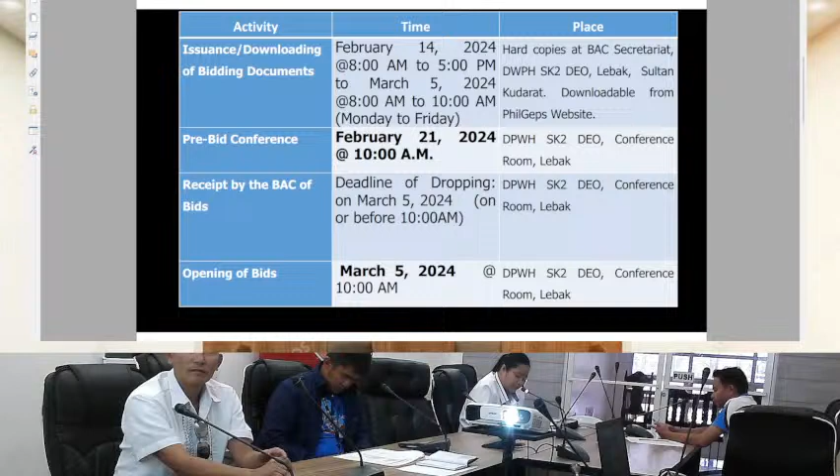Later on, the documents to be submitted, the technical and financial proposals, were discussed by Mr. Franco Valorizo. The criteria and procedure for eligibility check, preliminary examination of bids, detailed evaluation of bids, post-qualification and award were discussed by another BAC secretariat member, Mr. Alan M. Freno. We checked the live streaming for comments and questions from the bidders and received none. For other matters, it was discussed by Mr. Valorizo. For these three contracts, one contract, 24MH007, will have a supplemental bid bulletin to be uploaded today. That's all, sir. Thank you.